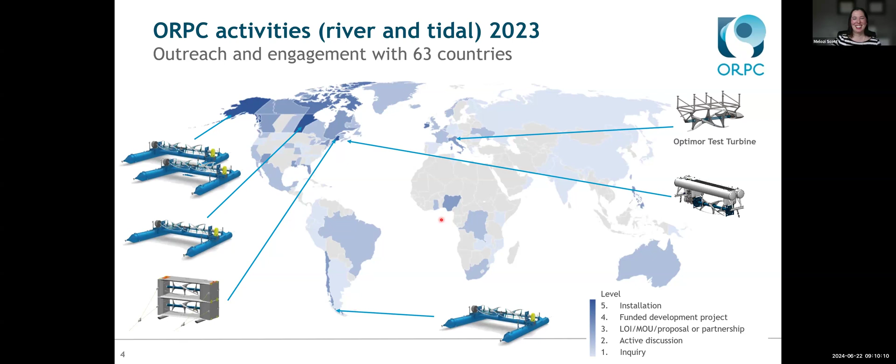So I'm going to give a brief background on marine renewable energy. We do know, most people are aware, we have thermal energy, wind energy, wave energy, and tidal energy.

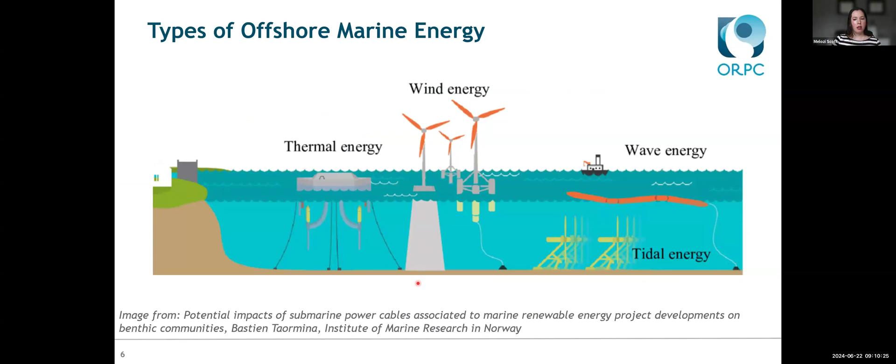And there are, but no matter what, all three of them share the same challenges. We have harsh operating environments. If you can imagine storms acting on wind powered devices and wave powered devices, or for in tidal situations.

Whoa, don't start. Okay.

If you imagine a tidal environment, we also have to worry about what depths we're at and how well our device can perform or be installed at certain depths. We also have to worry about how failure in our technology affects the investors and everyone else, because it does scare people off. So we have to prove ourselves every day how we can be reliable and how we are capable of engineering appropriately.

So we are a unique source of renewable energy. I like to say that we are almost as reliable as nuclear.

So the marine energy has minimal land requirements. The majority of what we require is an area to build and install our devices once it's out on site.

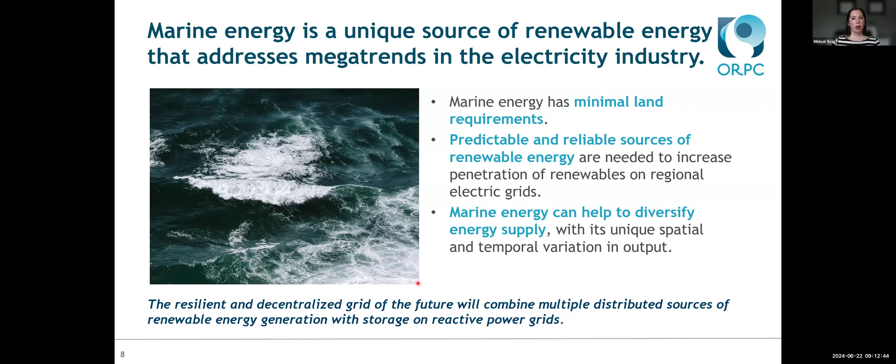All right, so I'm going to go into the ORPC specific devices. We have a tidal generator unit that was again installed last summer. This is a quarter scale unit, so we are actually going up to an 80 kilowatt system for the next step. It is an underwater device that produces electricity from tidal currents. Again, like we had a successful test last summer, and we are in development for a full scale system.

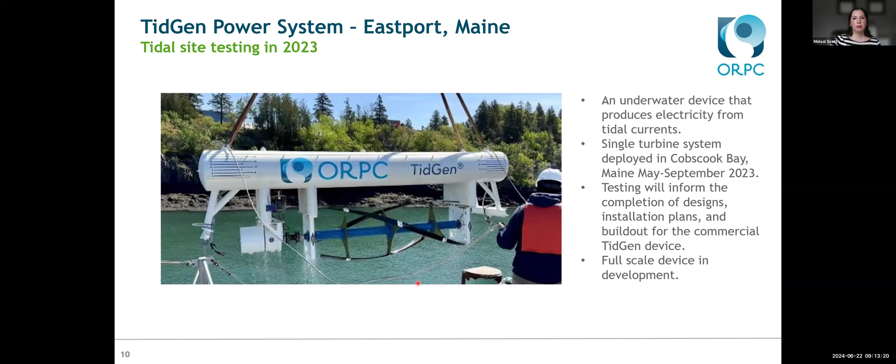And then our RivGen power system produces power from sustainable river flow while it rests on the riverbed. And this is what I'm going to be focusing on today, because I believe the rivers are affecting the general community that is on the call today.

So we have the longest operating hydrokinetic project in the Americas. We have successfully deployed over 18 consecutive months, and that was actually kind of accidental. It happened because of COVID, and we weren't able to get out to the location it was at. And it didn't require any intervention, and it was able to perform as expected during that entire time. So far, the important thing is we've seen no negative effects on the environment. This includes wildlife and flow of the rivers.

And it's really cool, like this image of the ice, we are able to work with things going overhead.

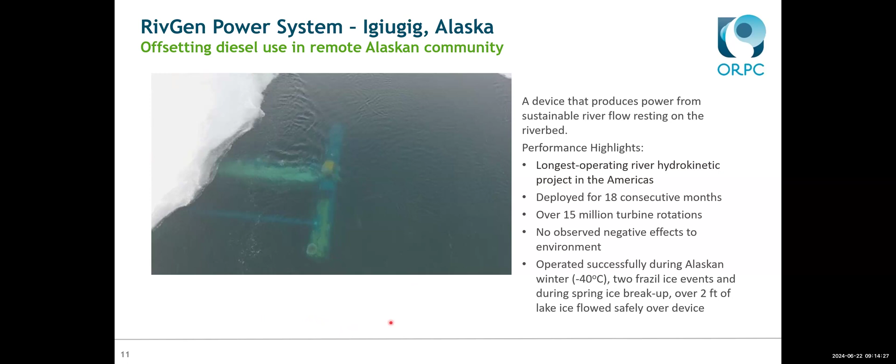Marine hydrokinetic benefits, the advantage of river projects. Let me describe a capacity factor really fast, since most people don't know it. A capacity factor is how much is actually produced. Say you have a car going 80 kilometers per hour, but you have to stop at stop signs, traffic isn't always going 80, so you're reducing and increasing your speed throughout the day. By the end of the day, you might see you've only averaged 40 kilometers per hour. That means you have a capacity factor of 50%. I hope that explains it a little bit.

These numbers were adjusted for Nigeria specifically. We have a capacity factor of 65% in Nigeria, and our footprint for that is only 0.12 square kilometers, which is the little blue box here. A wind project has only 8%, shown in this big green box, and a solar project has 13%, our little yellow box. So you can see why we believe and know that hydrokinetic energy is a more reliable source of power.

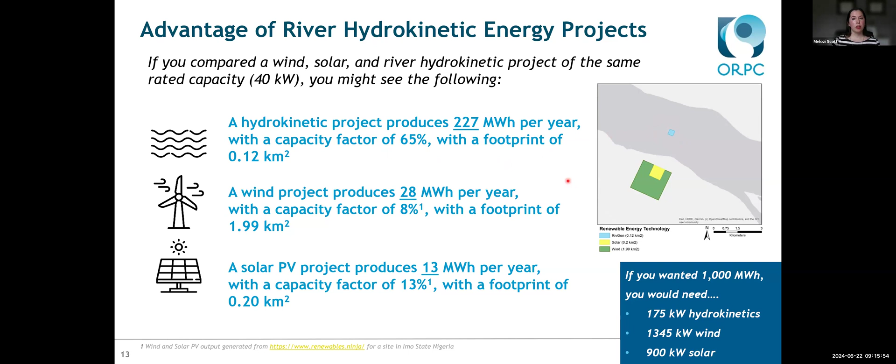Through these projects, we've demonstrated that the benefits of off-grid or remote communities moving to marine renewable-based power can be dramatic. Independent academic research has shown that a RivGen system has the potential to reduce the carbon intensity of a community by 98%, switching from diesel. This can save a community over 3.4 million liters of diesel over the lifetime of a project. Given the exposure of remote communities to the current upward trend in fuel costs, which is astronomical, solutions like this have never been more important for us.

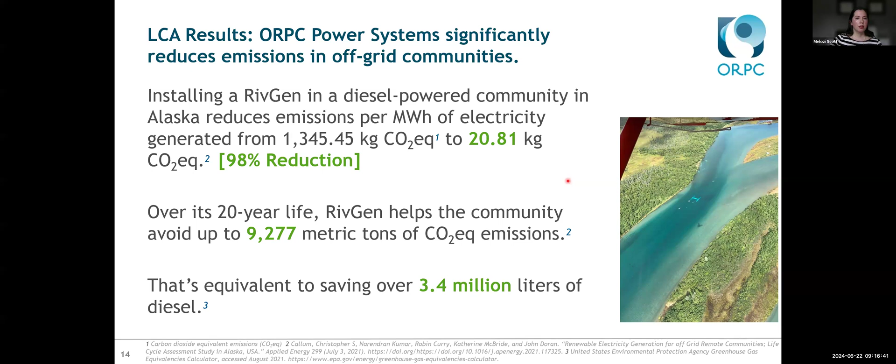Here's a little bit of information about how this works. We have a microgrid managed by our smart controls, or what I like to call our magic box, which is in the middle of everything. It can intake from solar, diesel, or wind on top of our RivGen devices. So what happens is the electricity from the RivGen device goes into our microgrid, and then it gets put out onto a community-scale baseload power.

Or if the need isn't as high and we have excess electricity, it can be sent to an energy storage system, which acts like a giant battery. So when the electricity is needed again, it can be returned to the microgrid.

Should something happen to the RivGens where they need extra power submitted to the microgrid, or even if we're just working in conjunction with these products, we can use solar, diesel, or wind as a backup as well. Actually, currently in one of our projects, we have a solar panel on our microgrid to give us excess power should anything go out, because we need to keep our sensors and everything available for us to read remotely.

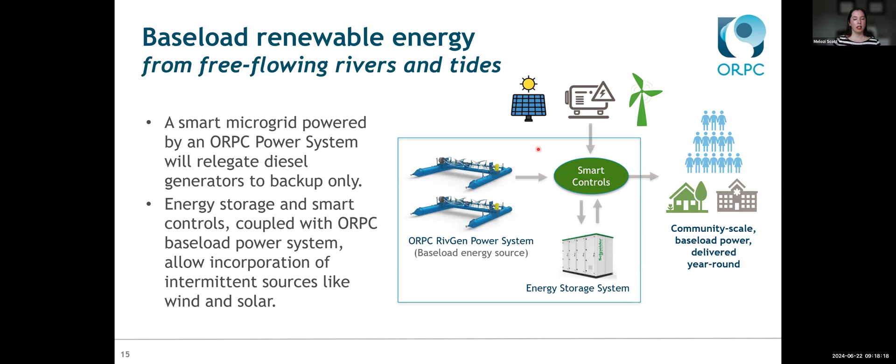So the energy potential for a single RivGen: we could power 2 to 6 public buildings at once, 550 to 1,600 homes, or send an electric vehicle around the world 50 times. The caveat with the 2 to 6 public buildings is that it's based on US public buildings that have refrigerators and other high electrical usage items, so it could be higher for remote communities. The 550 to 1,600 homes has such great variability because we don't have enough research on the seasonal variability in the flow of the rivers where this information is taken from. But we still see a benefit of baseload power, minimal land impact, and it coexists with marine life well.

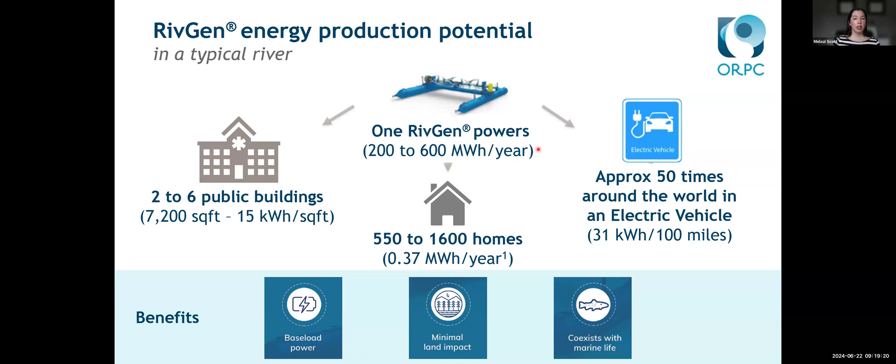In our remote communities, specifically Igiugig, we combine this with batteries to provide baseload renewable electricity. We've been able to run with the diesels off 60 to 90% of the time. It could be higher, but the reason it's not is because they cannot turn off their diesel generators, since it takes so long for them to kick back in.

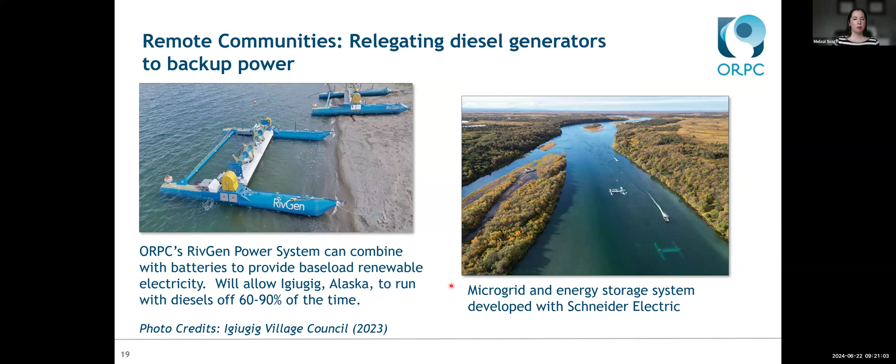We have modular, decentralized generation capacity that can be deployed as individual units, which we have done. We have small arrays, which is our situation in Alaska, and we can do large capacity arrays, so if you have a wider river plus a higher need, we will add three, four, etc.

It's been proven in challenging environments. It's been through multiple winters, negative 40 degrees Celsius temperatures, and rivers freezing over with ice running straight over it.

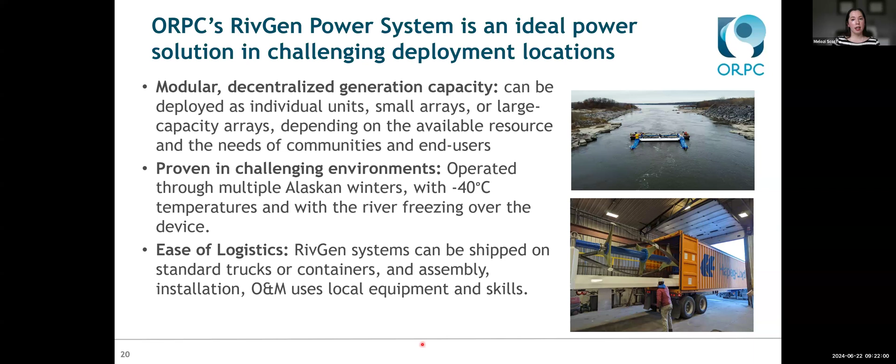The ease of logistics means it can be shipped on standard trucks and containers, assembled, installed, and maintained using local resources and equipment, which is very important. It boosts the economy as well as the pride the community has in the project.

So here's some details. Conventional types of river hydropower: we have diversion, or run-of-river, hydropower here, where channels flow water from a river through a canal to spin a turbine, and the flow can be regulated by the facility.

So here is what we are—excuse me, I have it in the wrong order. This one is the diversion. The impoundment is a system that uses a dam to store the water, and the water is released to produce electricity.

A pumped storage hydropower is kind of like a diversion, only it requires the usage of another power source to be able to fully run. I can describe that more later, but it works like a giant battery—it stores electricity from other power sources and runs from there.

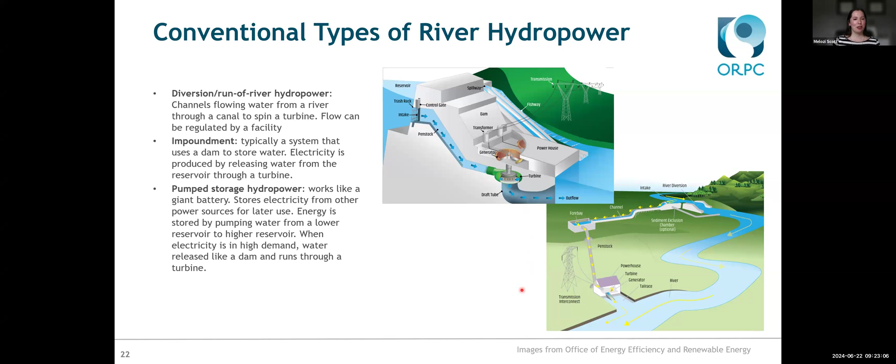The way that we differ is that we do not block the flow of the river like dams do, and we do not divert the flow of the river. The cross flow turbine design allows for shallow water deployment, is scalable for different locations, and can be installed and removed as necessary.

One of the other important things is that we are able to have fishing vessel traffic go over the device because of its depth, which was majorly important for where we have been installing lately.

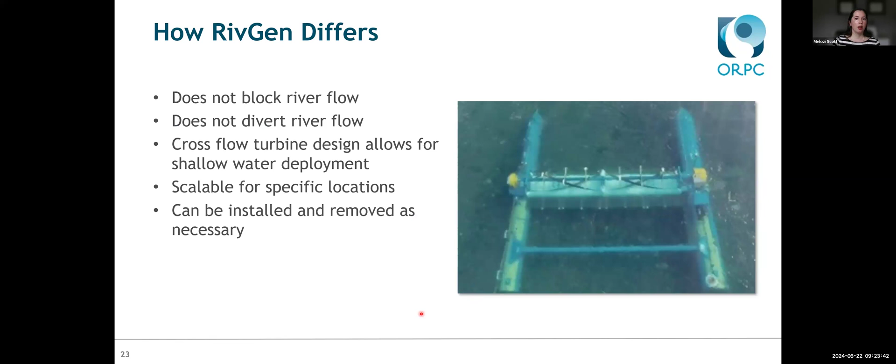The underwater power system can operate in river or tidal environments. It can generate 40 to 80 kilowatts based on water velocities, and it can be deployed in rivers that are only 5 meters deep, so it's very usable in different locations.

The way it works is you have these 15-meter pontoons, 14 meters apart, that float the device out, and I'll describe their installation in a second.

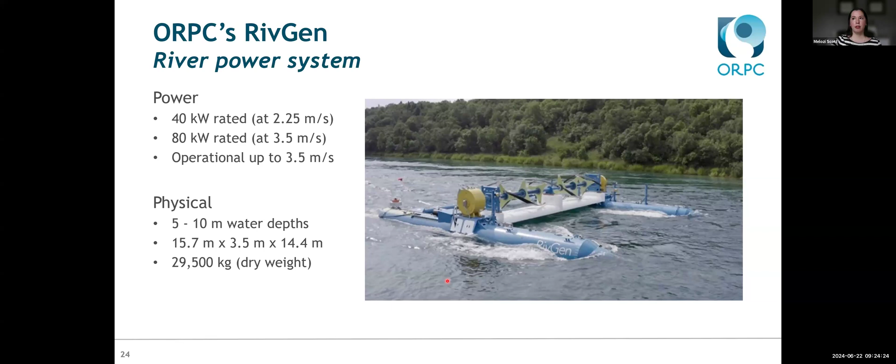The variable frequency drive rectifies the variable AC into stable DC, and an inverter converts the DC into grid-ready AC. Then there are onshore device controls—those allow us to alter how much power needs to go on the grid and where it's being supplied to. Our computer interfaces and networking are also in the container, as well as the disconnects between the grid and the RivGen, and a transformer.

We do computational fluid dynamics, which utilizes a program called OpenFOAM—it's open source and it's absolutely great. We have deployment analytics for the design, which utilizes Proteus, a very simplified modeling tool. We do our assembly drawings in SolidWorks, and our results and checks are done using SMath, a program that handles all the different units and is able to do all the computational work that we need.

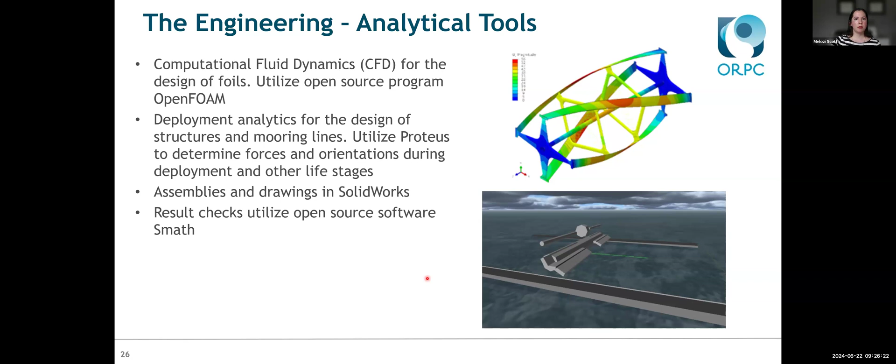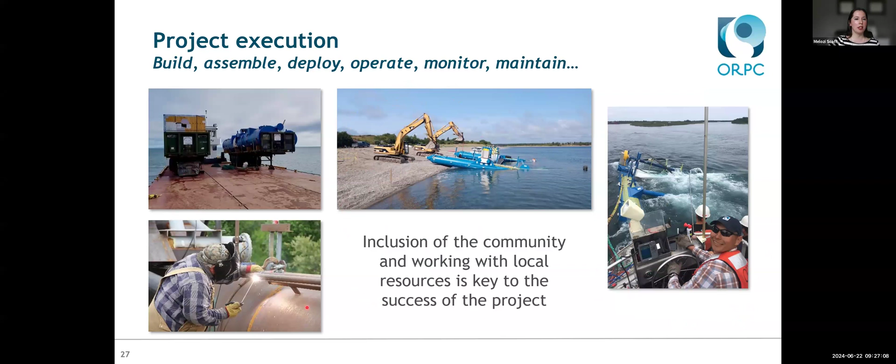This particular community you can only get into by plane or by going upriver in a barge. So this is our shipping of the pontoons here, and as you can see, it can fit on a 40-foot barge just fine. It is installed using bucket loaders, and we have a small tug operated by John Salmon that is used for installation. All of our welding and everything happens on site using local resources.

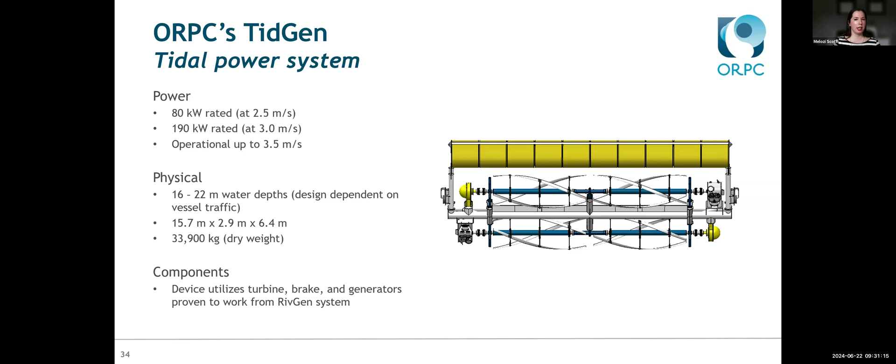The device utilizes a turbine, brake, and generators that work from the RivGen system. We've proven that that technology works, so we're sticking with it. And that is all I have.

But one of the things I wanted to bring up as well is the environmental impact. We have yet to see any fish deaths, and the environmental footprint is small enough that we have not seen any issues to riverbeds.

A couple other things: the site in Igiugig is one of the largest salmon runs in the world, and it's a miracle that we haven't had any issues with fish fatalities or disruption in their smolt and salmon run seasons. But that is it on what I could describe for river technology and what my company does in such a short amount of time. I wanted to go more into the tidal side because that is what I focus on, but this is what I have, and I'm open for any questions.

Oh my, this is great. This is amazing, and I was really wrapped around the technology. Honestly, I would really love more clarification on some parts of the demonstration and things like that.

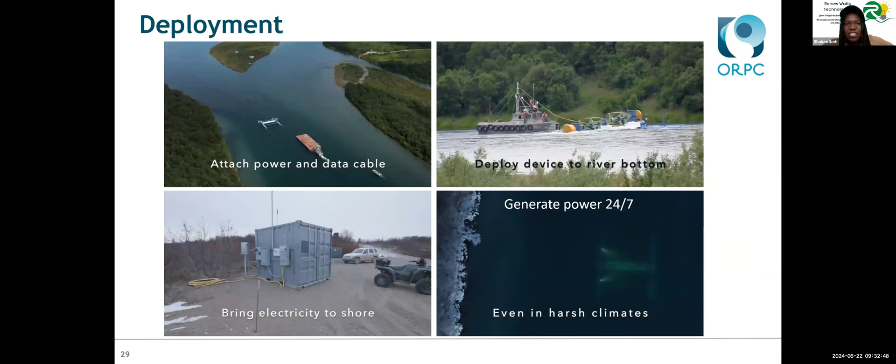So are you talking about this page? No, I think it was the part where you were showing the demonstration of how it's been launched and installed in the rivers. Okay, what sort of questions do you have regarding that?

It is a very well coordinated process with local resources. I absolutely love that. I mean, I was just saying this is a great opportunity, even that the project is coming to Nigeria, that will create a lot of jobs for the local communities there. Yes, oh yes.

And then not only that, but you have the influx of our employees or extra resources that we have to bring in. So then you have more of an economic boost there, not just in the physical work of the project.

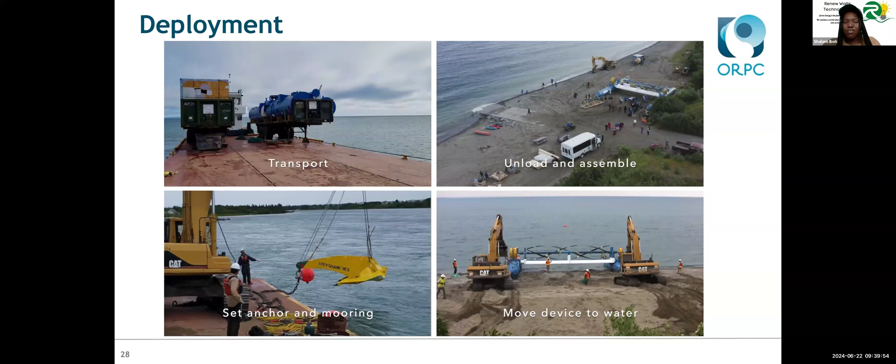I would just suggest that maybe the questions stay to the end of Charlene's presentation, so we can look at that as well, and then discuss if that's fine with you. Would you still be available after Charlene's presentation? Oh yeah, I'm available. Oh, thank you so much. Great, you're welcome.

So that was amazing. I was expecting to see a lot of fire emojis, thinking this place would be flooded with them, because that was really impressive. I didn't know tidal energy had such an amount of power generation, and it's really impressive to see. I hope tidal river energy can be supported much more and receive as much presence as solar. That was really interesting. Thank you so much, Leslie.

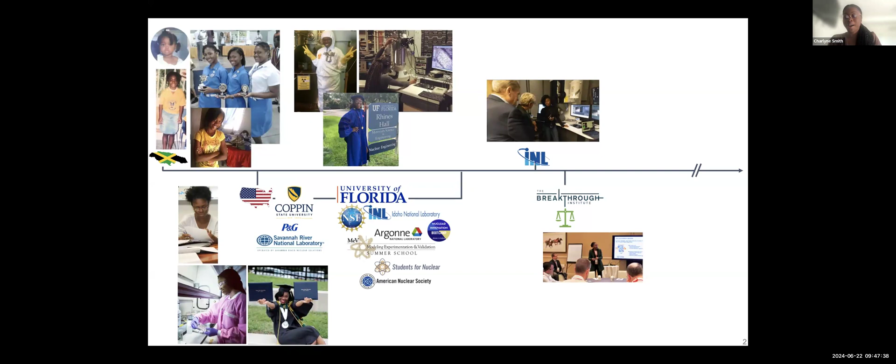I spent a little time in policy and regulation, didn't love it, so I went back to engineering shortly after and had the opportunity to present my research in multiple different countries.

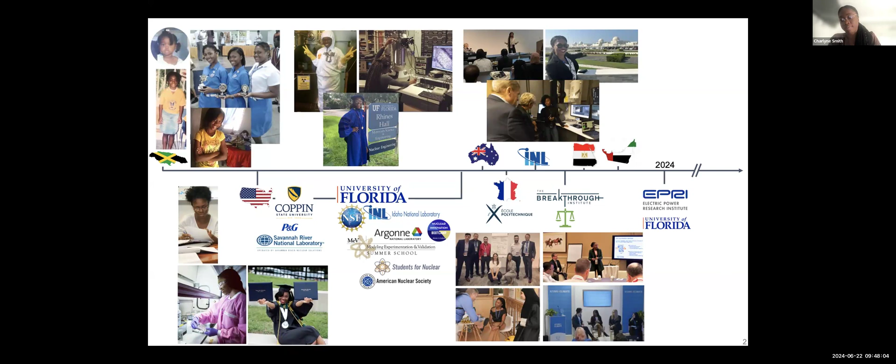Currently I am at EPRI, the Electric Power Research Institute, as a nuclear engineer and scientist, so I wear both hats. I'm also a research scientist at the University of Florida, where I primarily collaborate with upcoming PhD students on their research projects.

In my free time, I typically like to go back to Jamaica and develop different educational programs to introduce fields of study that are not currently offered anywhere in Jamaica or in the wider Caribbean.

One of the disciplines I really focus on when I go back, typically in the summertime or springtime, is teaching high school students, university students, and even professionals and the general public on nuclear engineering concepts. The reason for that is because the Prime Minister of Jamaica announced interest in exploring nuclear energy for their energy grid. So I used that opportunity to develop some technical programs and have those launched in Jamaica.

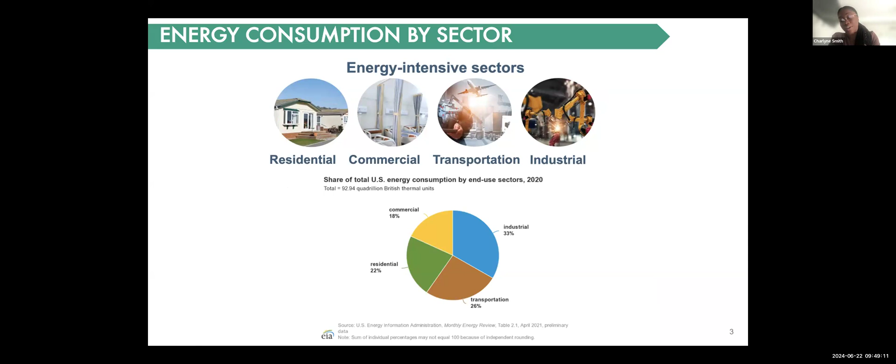So jumping right into it, we know that we use energy for different parts of life, whether in the residential, commercial, transportation, and industrial sectors. The underlying point I'm trying to communicate with this slide is that we need energy—we can't really get away from it.

I'm sure you've already had webinars on climate change, emphasizing the importance of addressing it. And energy is a big thing that ties into that.

When I give these talks, particularly in Jamaica, I like to make the statement that small island developing nations, although they're not on the forefront of contributing to greenhouse gas emissions, they're on the front line to receiving the brunt of the effects of climate change.

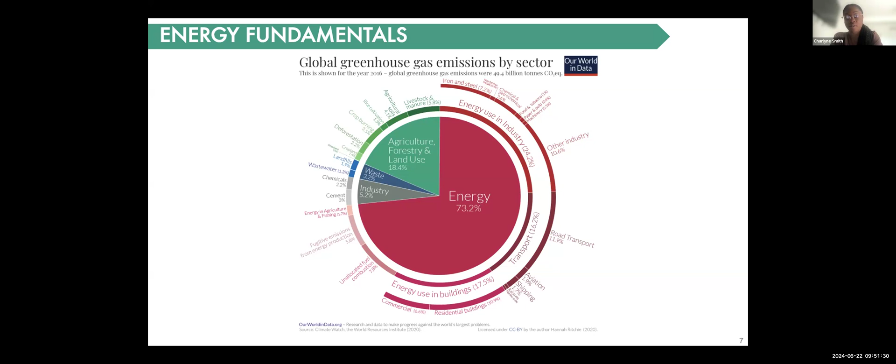Why are we talking about energy in the first place? Because when we look at the contribution of global greenhouse emissions, energy is a huge contributor. We use energy in the residential sector, the commercial sector, in hospitals, schools, workplaces, transportation, and industrial uses. So minimizing or decreasing the contribution of global greenhouse emissions from energy is a top priority, because that is the main driver for climate change.

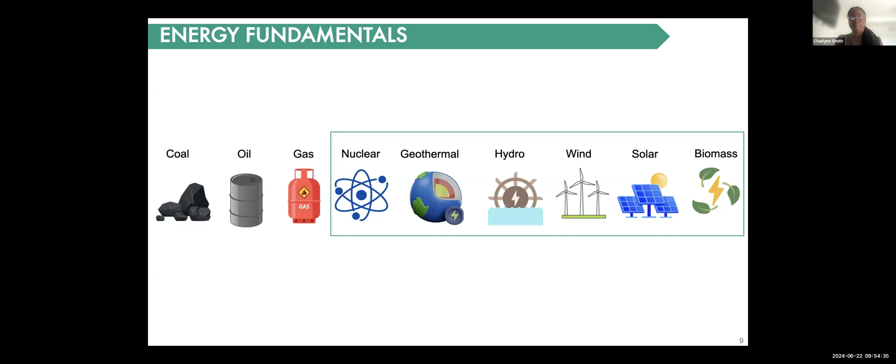Moving forward until the end of the presentation, we're just going to focus on the cleaner energy sources. It's important that we have options when looking at clean energy sources, because the more diverse your energy grid, the more reliable and secure it is.

So let's talk about Jamaica for a second. Jamaica has set a global renewable energy target to have their grid made up of 50% renewables by 2030. It's now 2024 — six years from now, Jamaica is attempting to go from about 13% renewables to 50% renewables in six years. Very, very ambitious, but that's the goal that has been set.

Primarily, Jamaica uses oil and natural gas beyond renewables as part of their entire energy mix. What's important to note here is that solar energy has huge potential in Jamaica, because we have sunshine for most of the year.

I think having a strategy tailored specifically to the region you're looking at — in the case of Jamaica, at least it's my view that Jamaica should build out as much solar as we can and use that as the main driving energy source, then have other clean energy sources act as support or act as batteries to support solar energy during times of intermittency.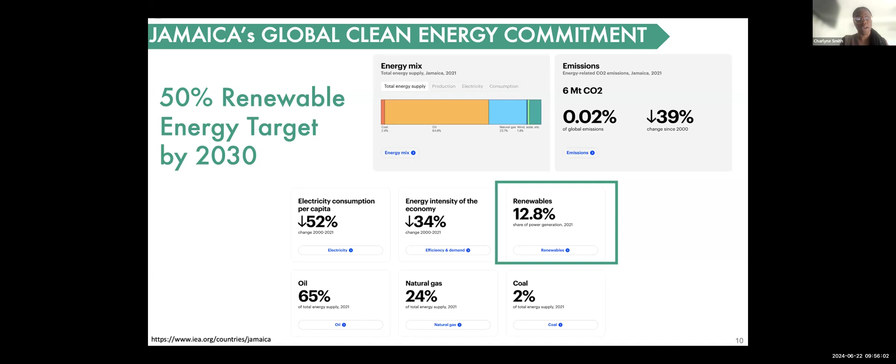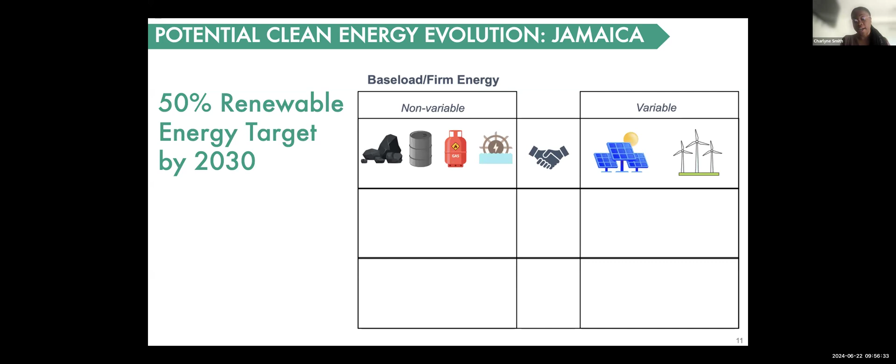In the past, we've used coal. Right now, it's primarily oil and gas and hydro, but our hydro capacity is still very low in comparison.

Right now is ultimately a transition period, if you will, for Jamaica, because they've expressed interest in considering nuclear energy. That means that as they transition to their clean energy goals, they're going to want to remove a lot of their hard or heavy carbon energy sources, particularly oil. So it's not a case where you say, okay, we want to go 100% clean energy, let's immediately shut off oil and gas and just see what we have. That's not something that is feasible.

You need to be able to have a smooth transition, and what that means is utilizing natural gas ultimately to help with that transition, while we're considering other clean energy sources, including nuclear, and while at the same time we're building out a lot of solar.

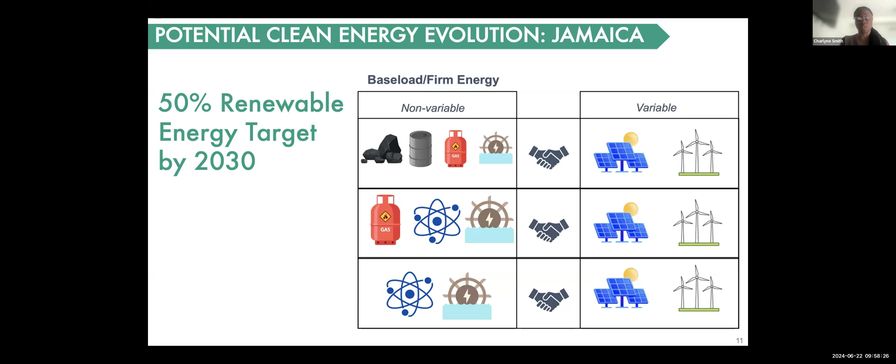And this case is specific to Jamaica, right? So you could consider different templates for different regions depending on what type of assets you have from an energy standpoint. Then ultimately, when we are at 100% clean energy economy, once we've developed an infrastructure in the transitioning period for nuclear energy, we have a regulatory body, we have policies that incentivize nuclear energy, and we have the human capacity to be able to get that industry up and running, then we can look at having nuclear energy and hydro supporting primarily solar, because solar has the most potential naturally in the region.

So let's talk about nuclear energy. I'm not really sure what the background is for everyone, but I'll try to break it down from the fundamentals, and then we'll work our way up.

Nuclear energy is the energy that's released from the splitting of atoms.

I don't know if you can see my mouse. Can you see my mouse? It's moving, just need confirmation if my mouse can be seen. Yes, I can see it.

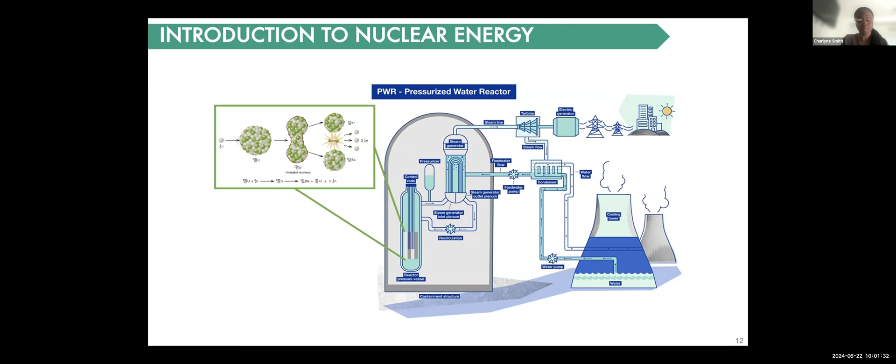Looking at the first attribute, we want it to be clean. Second attribute, is it safe? Let's talk about safety. One of the first things that usually comes up when I talk to folks is radiation. Okay, let's talk about radiation for a second.

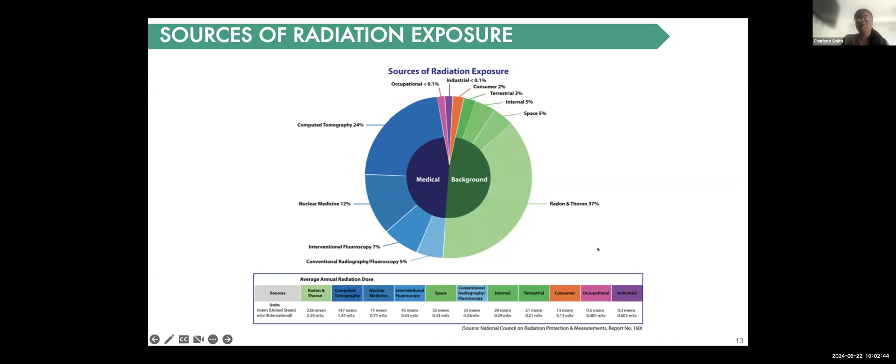Let's put that into more context. If you go to the hospital and get a whole body CAT scan, you getting that one CAT scan receive 1,000 times more radiation than living next to or near a nuclear power plant in one year.

Wow. Just to give you an assessment of what that is, if you're living in a high elevation area, let's say Denver, Colorado, or Seattle, you're receiving 500 times more radiation from being in that elevated space compared to living near a nuclear power plant, again for one whole year. Same thing even at sea level.

Because the lower you are in elevation, the less radiation you are exposed to. The higher you are in elevation, the more radiation you're exposed to, which shows when you go and take a cross-continental flight.

The exposure you get from being in the airplane is extremely high because you're at a high elevation. But even at a lower elevation, being on the beach in Jamaica for example, I would be exposed to more radiation in a year than if I lived near a power plant. Just to put things in context here.

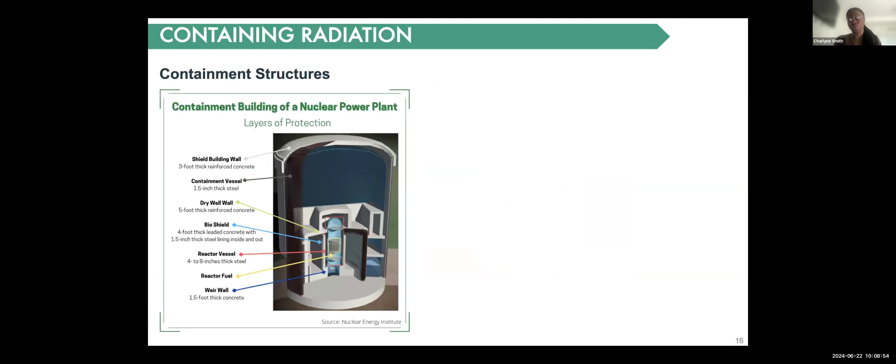If we look at a study done at Sandia National Laboratories in 1988, they wanted to test the durability of these reactor containment buildings. They constructed the same sort of reinforced concrete used in nuclear power plants, and took an F-4 Phantom jet going 500 miles per hour, approximately 804.6 kilometers per hour, and crashed it directly into that material. The worst thing that happened was a scar less than 2.5 inches deep.

Just to give you an understanding: yes, it's for radiation protection, but with all the reinforced concrete on top of reinforced concrete on top of reinforced steel and concrete, it's also designed to be resistant to collisions. For example, if an airplane is flying over a nuclear power plant and crashes into the containment building, which houses the nuclear reaction, the plane is what's destroyed, not the containment building.

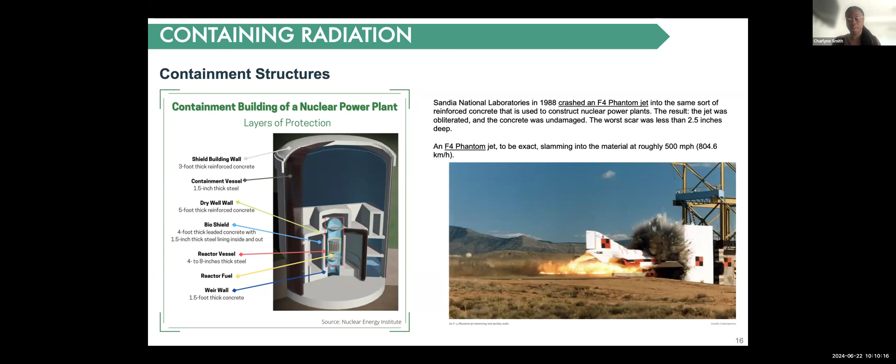And so that's on radiation. The other conversation that comes up is the waste. All energy sources have associated waste.

Let's talk about this particular nuclear reactor really quickly. A lot of people get surprised when I mention that the first known nuclear reactor is not one that was made by man. In fact, approximately 2 billion years ago in Gabon, Africa, there was an Oklo mine that had conditions perfect for producing nuclear power.

The primary ingredients: you have to have a fissionable atom, so there was a concentration of U-235, neutrons to initiate the reaction, as well as groundwater able to carry the heat away continuously. The only reason they found this mine is that some French scientists investigating it realized a bunch of U-235 was missing.

Enough U-235 to make maybe 6 nuclear weapons. The French were concerned that someone had come to this mine, dug up all this uranium, and were using it to build a nuclear weapon.

But after further investigation, the only reason they knew material was missing is because anywhere on Earth, U-235 concentration is 0.72%. In this mine, it was 0.71%. I know that doesn't seem like a lot, but spread over the mine, it was about 200 kilograms of U-235 that went missing.

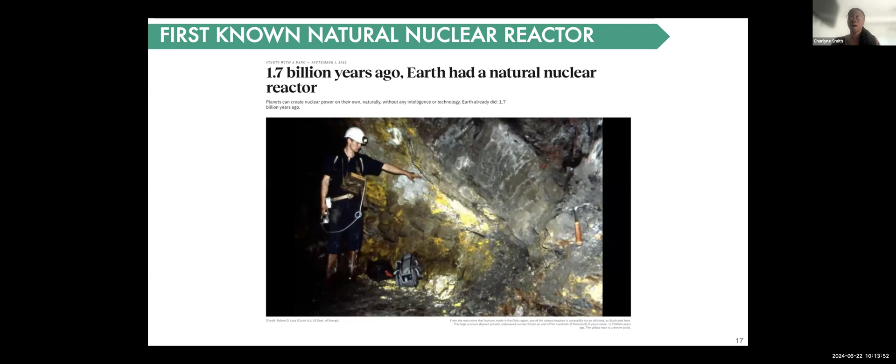So that kind of gives us an idea of how we can try to look at solving the waste issue, or trying to figure out what to do with the waste once it's produced.

So in this current day and age, when we take out that fuel bundle - remember when I talked about the nuclear reactor, you have the fuel at the bottom of the reactor pressure vessel, that's basically steel - you take it out of the reactor, and when you take it out, it's extremely deadly. This stuff is hot. You don't want to go anywhere near it without protection or procedures that implement safeguards, because this material is extremely hot and extremely radioactive.

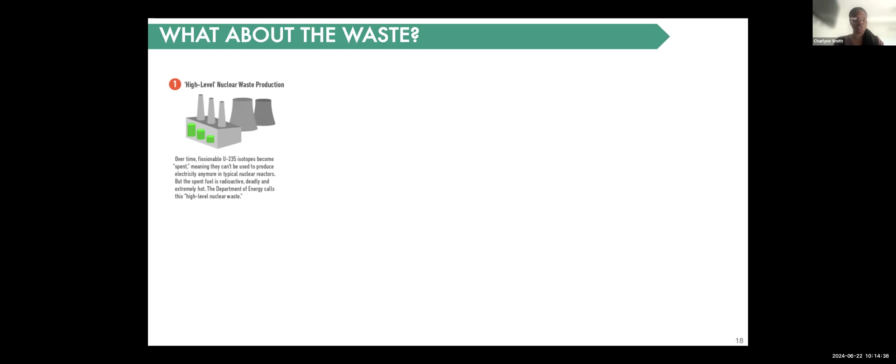So once they take it out of the reactor, what do they do? They put it in pools. The reason we put it in pools is we want it surrounded by water because it shields us from radiation, but also it's cooling those elements. Even though fission is no longer happening with this material once removed from the core, you're still producing heat through radioactive decay. So the point of putting it in a large pool is, one, to shield from radiation, and two, to be able to cool those spent fuel elements.

After about 5 to 10 years of cooling in that pool, they take them out and put them in dry cask storage, encased again in steel and concrete. You see these materials being used over and over, primarily because of shielding and also physical protection. So they put them in these dry cask storage units.

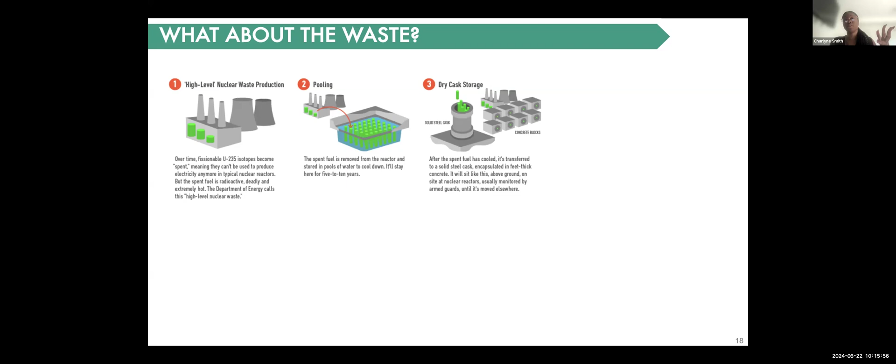For places like the US, what we've done is put them in dry cask storage and sit them at the site where they were created, at the power plant sites, and just leave them there until we figure out from a policy standpoint where we're going to go from there. That's specific to the US, just to give an example.

But let's say the US figures out that, okay, we're going to bury it in a deep geological repository. Then they take them out of the dry cask storage, transport them to a permanent geological repository, and bury them and leave them there. But is that the only way to do it? Let's talk about recycling for a second.

You can recycle 96% of this spent nuclear fuel, or this nuclear waste, let's say. So recycle it, throw it back into the reactor, produce more energy, recycle it again, put it back into the reactor about 3 different times. Only 4% of the spent fuel that comes out of the reactor is really just waste - you can't reuse it. So that 4% definitely has to be buried.

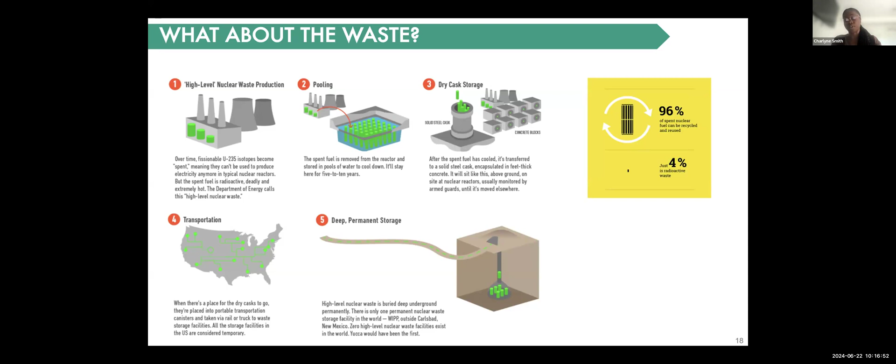But if we start recycling pieces of it - let's say we recycle uranium and plutonium - we are now decreasing the radiotoxicity. So instead of being radiotoxic for hundreds of thousands of years, we're now looking at tens of thousands of years.

But if we recycle the uranium, the plutonium, and the minor actinides, we can decrease that radiotoxicity all the way down to being radioactive only for hundreds of years. Still sounds like a large number, but at least we can measure it in human timelines that we can plan for and project out for. But that's really the best we can do here.

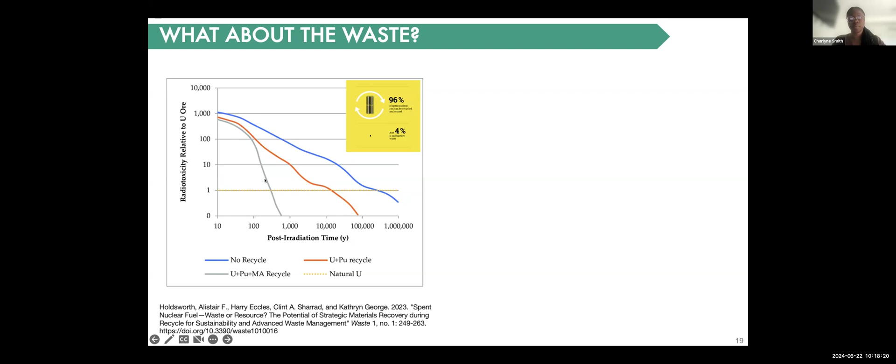There are countries around the world that are reprocessing nuclear fuel. France is a really good example. France has been recycling nuclear spent fuel for decades. In fact, 17% of the electricity that France produces comes from recycling that waste that comes out of the nuclear fuel. So it's something that can be done.

The US currently has a law that says it's illegal to reprocess spent nuclear fuel, for concern of nuclear proliferation. But if France has been doing it for decades and that hasn't been an issue, it's leading the United States to reconsider reprocessing of that fuel, because if you have the waste and it can be used, it can be reused to the point where we don't need to mine for new uranium, and you can reuse it three different times.

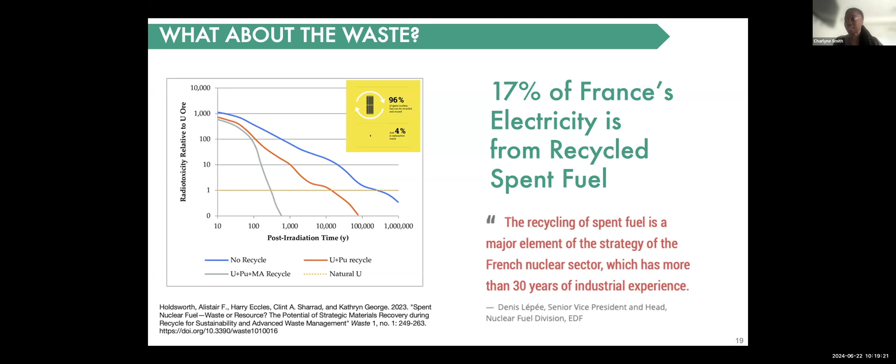We should be looking at using up our assets efficiently. Again, coming around to the safety system. People ask me all the time, why is nuclear energy safe? Is it really as safe as people say? And it's all in the engineering. That's the simplicity of it.

And then we put it in the second barrier, where we have the cladding, to prevent the release of fission gases. The third barrier is in the primary circuit. And then the fourth barrier is the containment, where we have reinforced concrete upon steel and more reinforced concrete, all tucked away and protected in the containment building.

As well as that, the reactors, or the power plants, are innately designed to withstand natural disasters. So here you see earthquakes, floods, tornadoes, storms, aircraft crash—because that's part of the testing that has to be done before we build out these reactors—and even shock waves. So when we talk about safety, there are a lot of redundant safety systems that are required. It's not an option, it's required to be built into nuclear power plants.

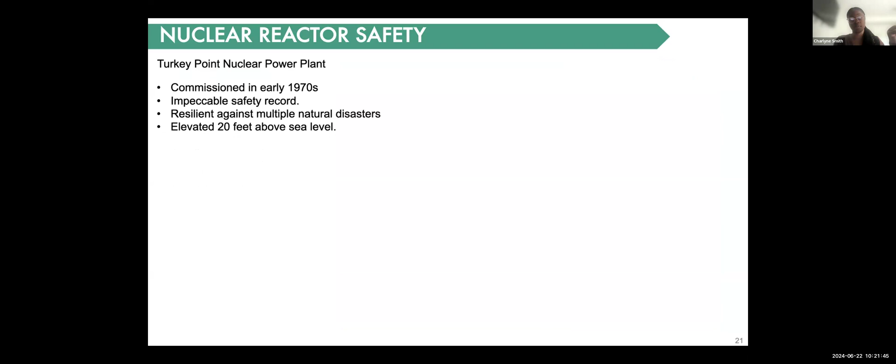So let's talk about natural disasters for a second. It's important to me, especially because the whole reason I got into energy is because of energy unreliability, especially during extreme weather events, i.e. when hurricane season comes around. So let's talk about Turkey Point, the Turkey Point nuclear power plant, commissioned in the 1970s, has an impeccable safety record. Back in 1992, and this is located in southeastern Florida, this is probably the closest nuclear power plant to Jamaica.

In 1992, Hurricane Andrew, a Category 5 hurricane, hit that nuclear power plant head on. And the nuclear power plant was fine. Have any of you heard of a Turkey Point disaster? No, right? Because it never happened. But we've heard of Fukushima. Let me quickly explain what happened at Fukushima, just to give you some context.

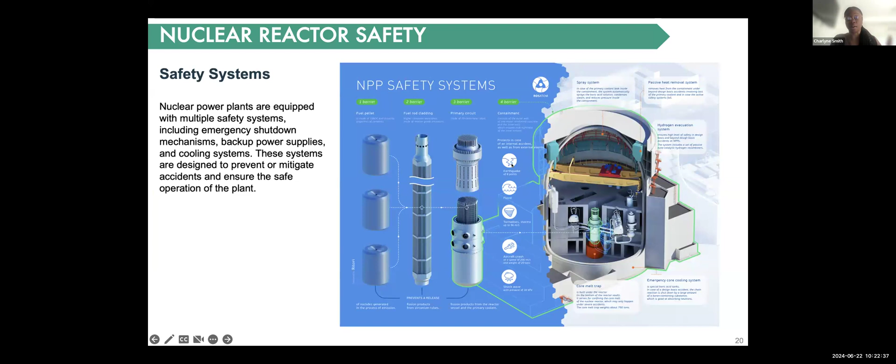Fukushima started with the earthquake. And if you go back to the slide here, the power plants are designed to withstand earthquakes. So for Fukushima, the earthquake happened. What happened was that immediately the reactor shut down as it was supposed to, because the earthquake triggered a safety event that allowed the reactor to shut down itself as it was designed. But even though the reactor shut down—and what that means is the fission reaction just stopped—you're no longer producing energy by fission.

But recall when I told you that even if you stop the fission reaction, you still have radioactive materials in the core, and you're still producing heat by radioactive decay. So you're still producing heat even though the reactor is shut down. The earthquake happened, the reactor automatically stopped the fission process, but we're still producing heat from the radioactive decay of the elements and isotopes in the core. That triggered the emergency cooling system, because you're producing heat, you still want to bring in water to cool the reactor. The problem was that they put the emergency cooling systems at Fukushima in the basement of the plant. Earthquake, reactor shut down, trigger the emergency cooling systems. Then what came next? The tsunami. As you can imagine, the tsunami flooded the basement that had the emergency cooling systems. The reactor had no way of cooling itself.

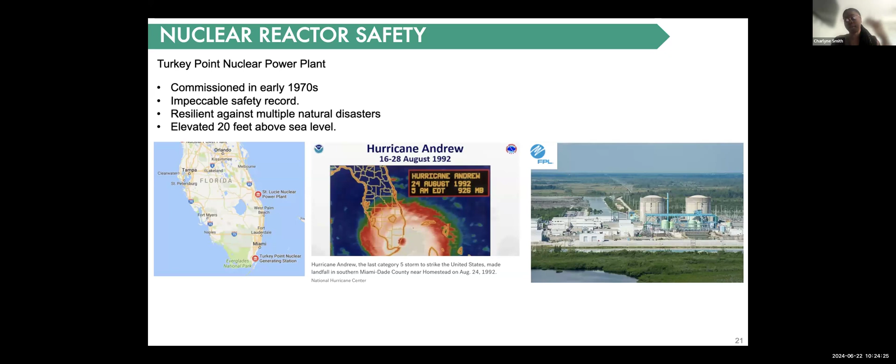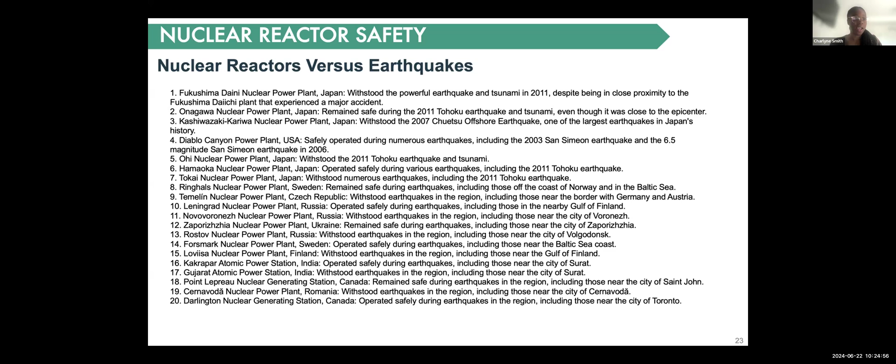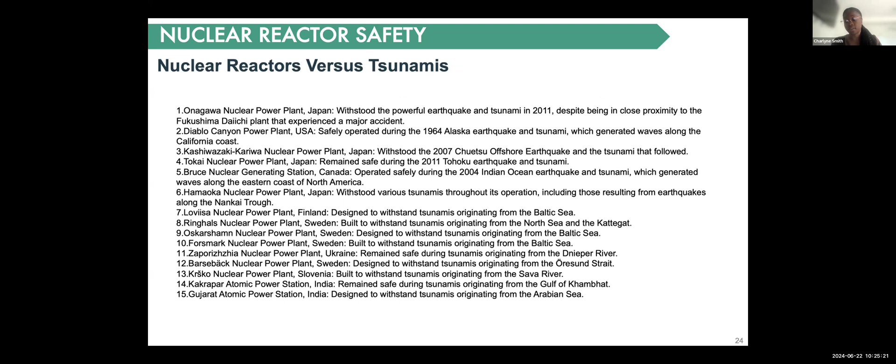But let's talk about other times where nuclear reactors were resilient versus hurricanes. Hurricanes that hit different nuclear reactors all around the globe, and we've never heard of any accidents. Same thing for earthquakes. Around the world, earthquakes have hit multiple reactors in Sweden, Finland, India, Czech Republic, Japan, and we have not heard of any accidents. Tsunamis, believe it or not, have hit multiple nuclear power plants all over the world, and we have not heard of any of these events because the reactor and the plant were designed explicitly to withstand these events, and even floods.

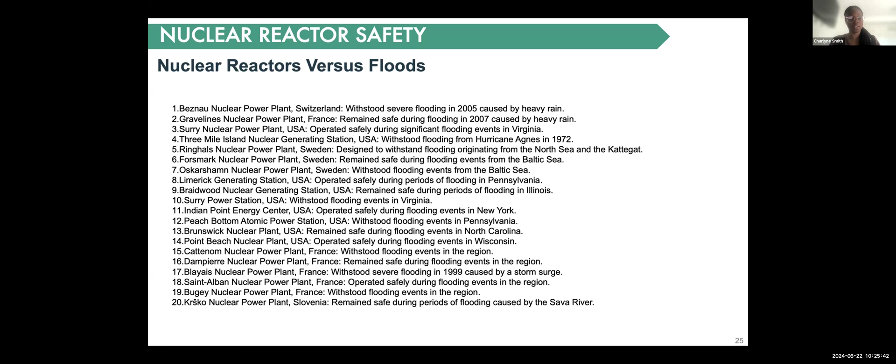We heard about the Three Mile Island accident, right? But there was a flood that happened, and we never heard about the Three Mile Island flood. So these are just some examples of reactors versus extreme weather events, being resilient because they're explicitly designed to do so.

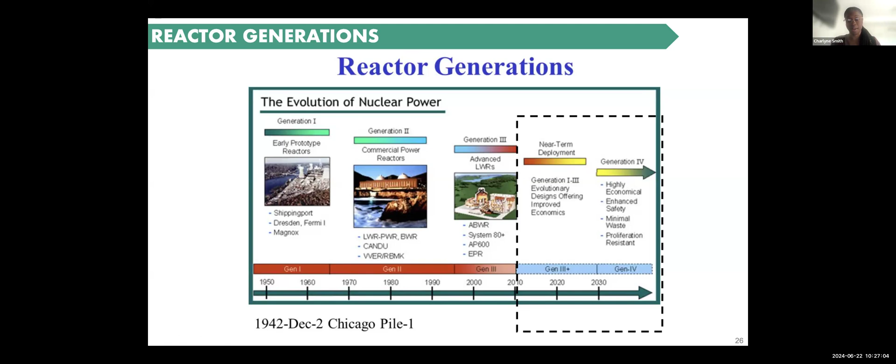Small modular reactors are effectively fun-sized versions of the large-scale conventional nuclear power plants. These reactors can scale from about 50 megawatt E all the way up to 300 megawatt E, which is the largest SMR you can have. For context, 300 megawatt E is about 1/3 the size of a conventional nuclear power plant, but you can scale down to 50 megawatts if needed. They're called small because they're smaller versions of conventional reactors, modular because you can factory assemble them with smaller components requiring less materials, and reactor because they produce energy through the fission reaction.

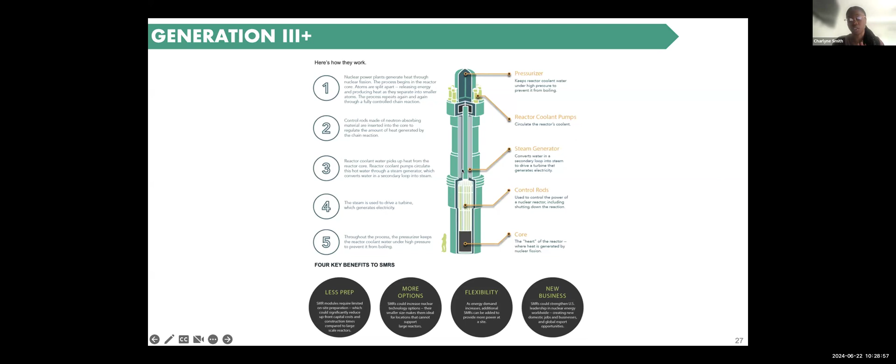So to give an example, going from the large power plant with its different components that I showed you, the small modular reactor is a condensed version that uses engineering efficiency to make these reactors smaller. Same thing applies: you have your pressurizer for water-cooled reactors to prevent water from boiling, the fuel core down here, and water that goes up through the reactor through the steam generator, which connects to a turbine, then to a generator, then down to a condenser, and back into the steam generator. But it's all in one module.

This is a video that's going to demonstrate that much better than I described it. The NuScale power system operation.

Control rods retract from the fuel, allowing a fission process inside the fuel rods to produce heat. Water is heated as it passes over the fuel rods, flowing up inside the riser.

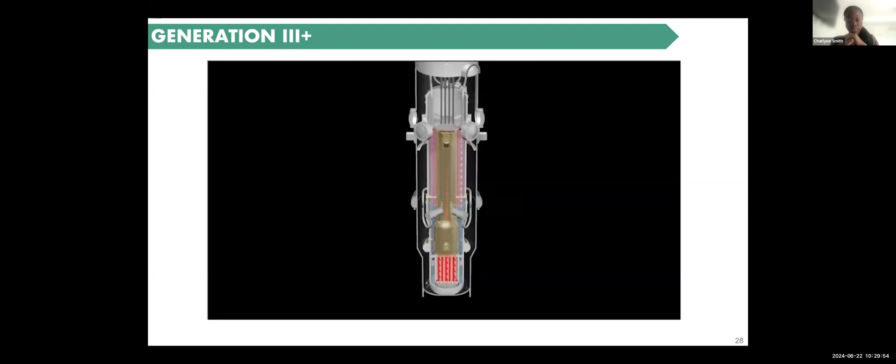The water is then directed down over the steam generators. Heat from the water in the reactor transfers through the steam generator tubes. The reactor water cools and becomes dense. Gravity pulls the cooler water to the bottom of the reactor, where the cycle repeats.

Heated water inside the steam generator tubes turns to steam. Steam exits the steam generators, and the pressure carries it to the turbine, where the pressure from the steam turns the blades.

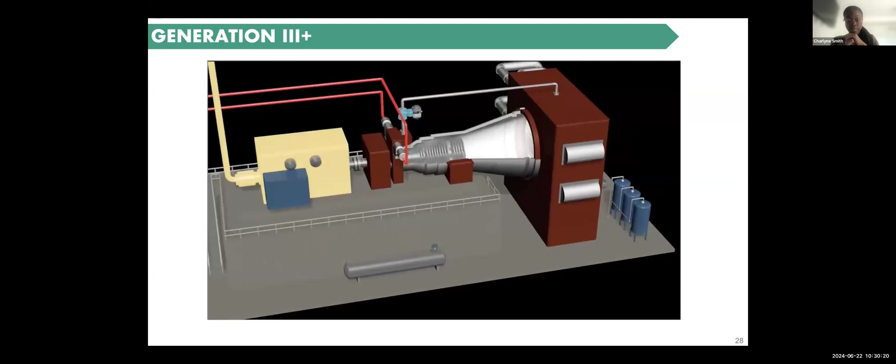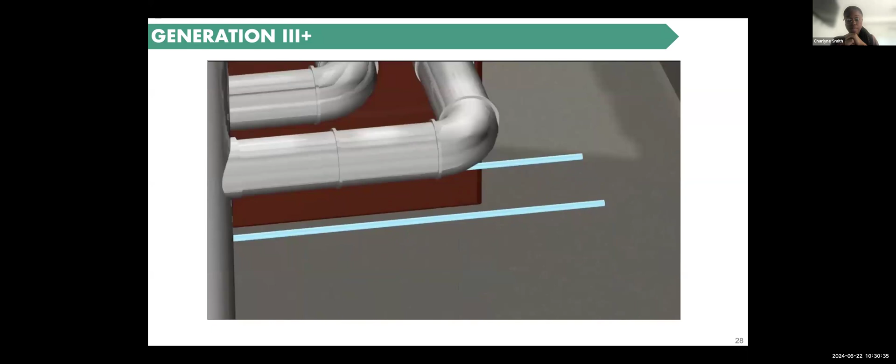A shaft connects the turbine to the generator. The generator turns to make electricity. Steam leaves the turbine and enters the condenser. The steam is cooled and returns to liquid water. Pumps send the water back to the steam generator, where the cycle repeats.

Okay, so that's effectively the water-cooled small modular reactors. But you also have the generation 4 reactor designs. Just because I'm running out of time, the ultimate difference between the small modular reactors and the generation 4 reactors is the coolant. The small modular reactor uses water as a coolant, the same water used to cool conventional reactors. So small modular reactors are essentially just small versions of the conventional reactors.

The generation 4 reactors don't use water to cool the core. Instead, what is used is liquid sodium. You can use helium gas in the very high temperature reactor design, and then you can use molten salt in the form of molten chloride or fluoride salts.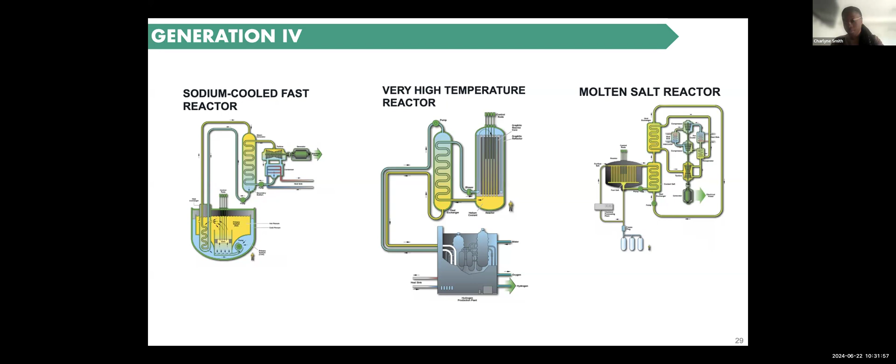So really, when you look at different types of reactors, the first question you should ask when talking about the differences among them is what type of coolant is used in the reactor. If you hear liquid metal, you're talking about sodium. If you hear about a gas-cooled reactor, you're talking about very high temperature. If you're talking about molten salt, fluoride or chloride salt, you're talking about molten salt reactors.

Currently, there are 416 reactors across the globe. 59 are actively being constructed, and then you have 200 that have been shut down. But currently, we have 416 reactors.

Let's talk about where we are in building out these SMRs. The first small modular reactor came online in 2019, the KLT-40S. But they went a bit further - they didn't just build an SMR to put on land, they built an SMR to put on a ship that is mobile, that can supply energy to coastal areas.

You also have online in China, the HTR-PM and the HTTR-30. The HTR-PM is a power reactor. The HTTR-30 is a research reactor that's based on the HTR design.

So the fuel that you're going to be using to power these small modular reactors - ultimately, it's a challenge because a lot of that fuel was expected to be sourced from Russia. But with the geopolitical challenges, a lot of different countries around the world are coming up with their own solutions, and that's taken a little bit of time to develop. However, the United States started producing our own HALEU fuel last year, and so we're well on our way to being able to produce HALEU for our future fleet.

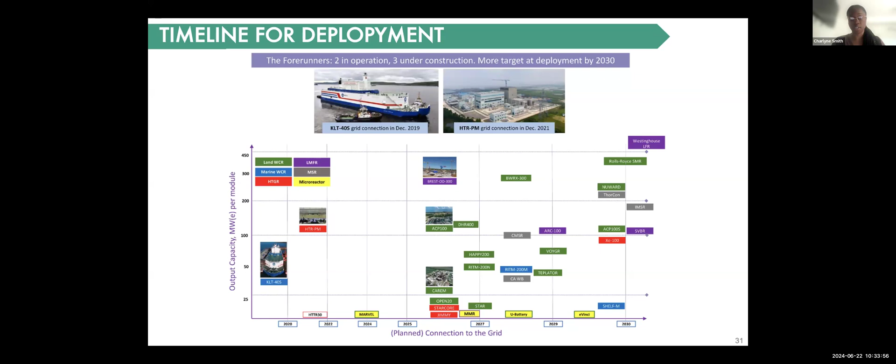I'll skip this - this is just all around the world, we have different types of SMRs that are being developed. That just goes to show that there's a lot of interest in SMRs.

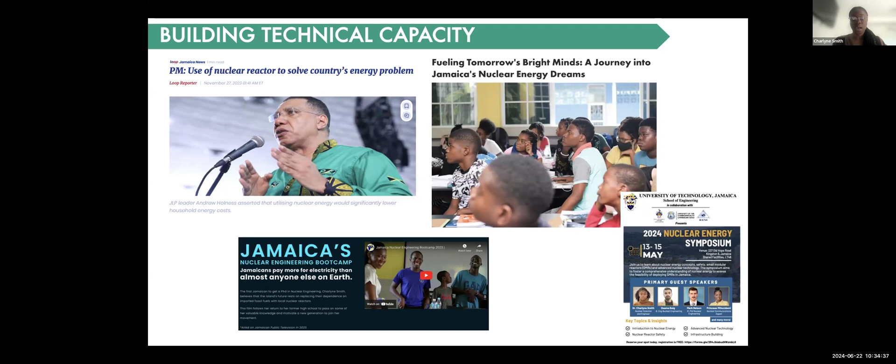And then for a lot of the work that I'm doing when I go to Jamaica, again, is developing these technical programs to introduce nuclear engineering as a field. So we're talking about highly technical concepts, whether I break it down for high school students, university students, or for the general public. I think it's important to address that social issue of understanding what the technology is, understanding the field, understanding its history, its present status, and its future, so that we can have more informed discussions on the potential deployment of nuclear energy.

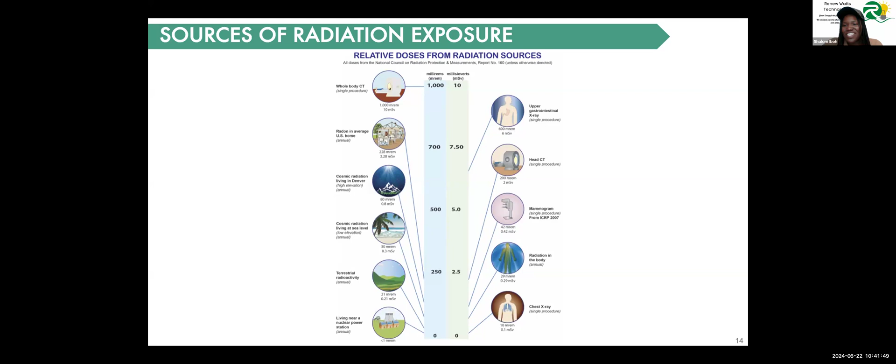Yeah, I love that. That really resonates with me. Science really makes dangerous things feel safe. Yeah. Oh, so thank you.

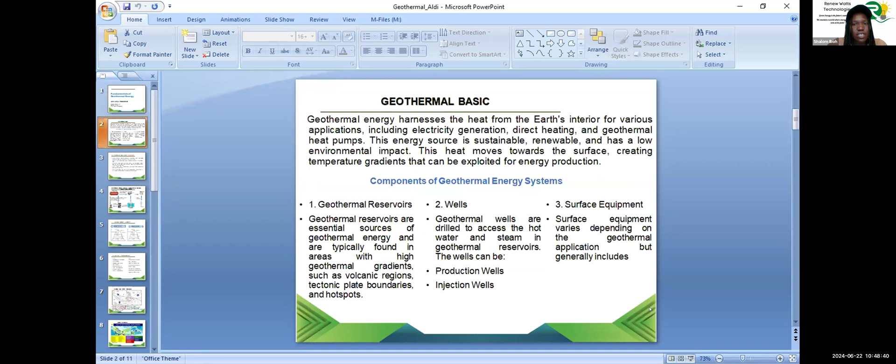We do not see the slide you're presenting currently. Oh, it's not moving. I think when I full screen it's moving, right? It's moving right now, but we still see only the first slide. Maybe you can just go to the slide of the geothermal energy illustration. You can see the full version, right? Yeah, I can see the demonstration. Okay, then I just talk about this one.

The turbine is connected to a generator that converts the mechanical energy from the turbine into electrical energy, which is then supplied to the grid or used locally. Then it goes to the injection well, and then piping, valves, and others. These steps illustrate how a single flash geothermal power plant operates, converting geothermal energy into electrical energy through the use of steam turbines and associated components. This system is commonly used in areas with high temperature geothermal resources.

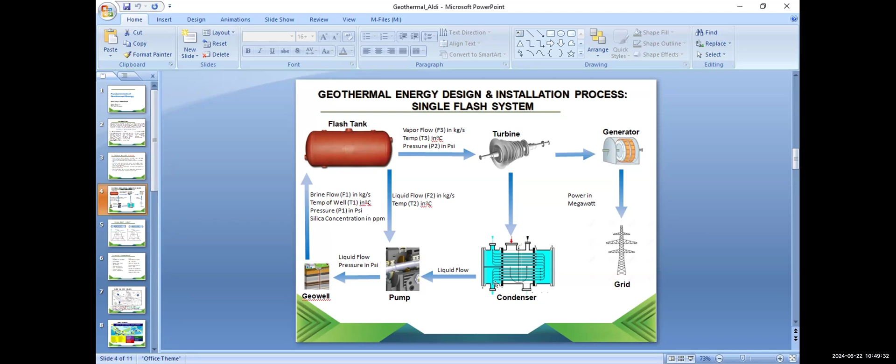Also, this one, the enthalpy and entropy diagram. I think it's more complicated, but I will explain it in a simple way. The diagram typically shows the boundary between different phases in the working fluid, for example water or steam. The saturation lines represent the condition under which the fluid is in a saturated state, meaning it's about to change phase.

The saturated liquid line is the line where the fluid is about to start vaporizing, and the saturated vapor line is the line where the fluid is about to start condensing. Also, the process path is the path a fluid takes during a thermodynamic process, which can be plotted in this diagram, showing the change in entropy.

For point 1, for example, the state of the geothermal fluid at the production well. Point 2 is the state after being separated, where the steam is extracted for power generation. States 2 and 3 represent the steam after expanding through the turbine. Point 4 is the state of the steam after it has been condensed back into water in the condenser.

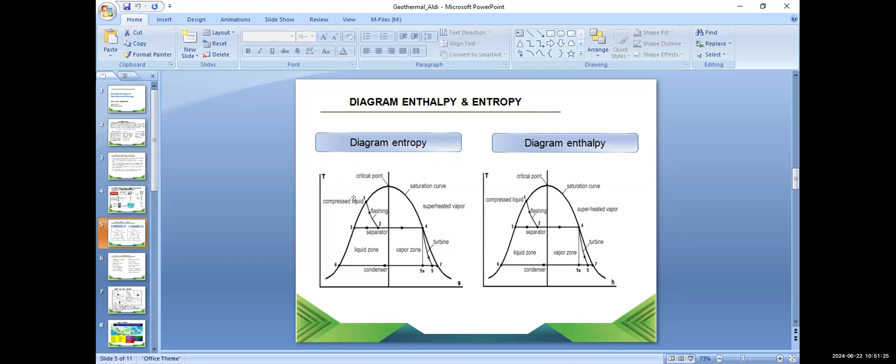And it allows us to see where the energy losses occur, particularly in the turbine and the condenser. By analyzing this diagram, engineers can optimize the process parameters to improve energy extraction and reduce losses.

There are pros and cons of geothermal energy. The pros are: renewable and sustainable, low emission, base load power supply, high efficiency, small land footprint, direct use applications, economic benefit, and energy independence. There are also cons: geographical limitation, high initial cost, resource depletion risk, environmental concern, water usage, complex site development, and for example, noise during geothermal power plant operation.

And this one, the case study of Indonesia: Indonesia is the largest archipelago country in the world, and we have more than 127 volcanoes and more than 342 potential geothermal wells, which makes Indonesia the second largest producer of geothermal energy. This is because Indonesia is located in the Ring of Fire. We are surrounded by three plates: the Eurasian plate, the Pacific plate, and the Indian-Australian plate.

But the issue with countries in the Ring of Fire region is too many earthquakes. Indonesia, the Philippines, Japan - these are countries where there is almost an earthquake every day. That's another issue with the Ring of Fire region.

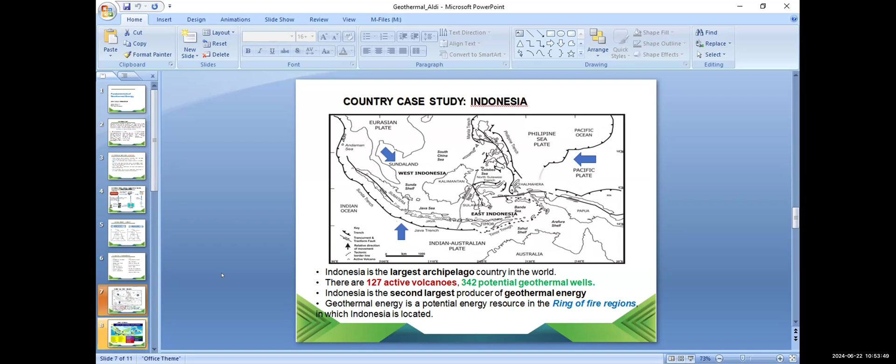As I told you before, we have more than 342 wells. Geothermal potential in Indonesia in total is more than 23 gigawatts, but still only a few of the potential that Indonesia can implement.

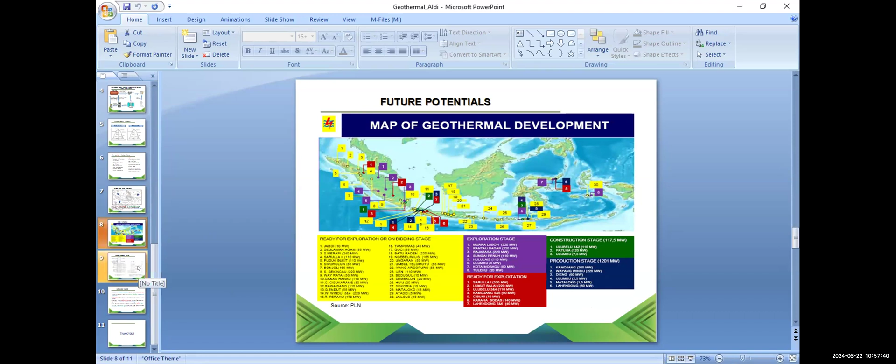Okay, there's another issue I will discuss: machine learning. Because why we don't maximize this potential, is because we don't use the technology - for example, the application of artificial intelligence, in this case machine learning. I think machine learning is the key for Indonesia, or for anyone who wants to maximize their potential.

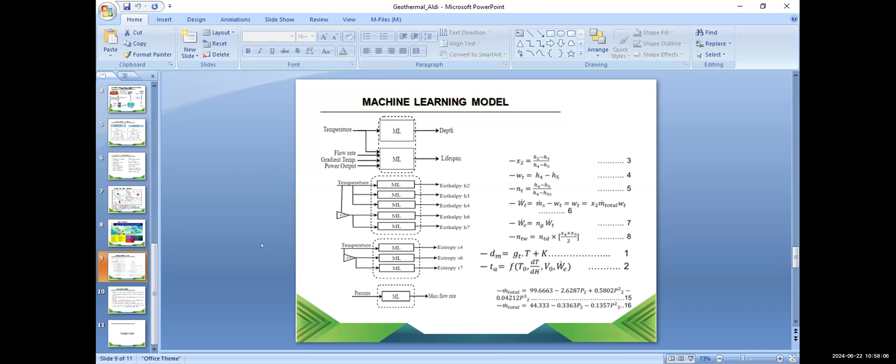And this is actually my model that I want to share with you guys. In 2019 I received an award from the Geothermal Association, and this is the model, and this is why machine learning matters - you can read this, because maybe the time is limited.